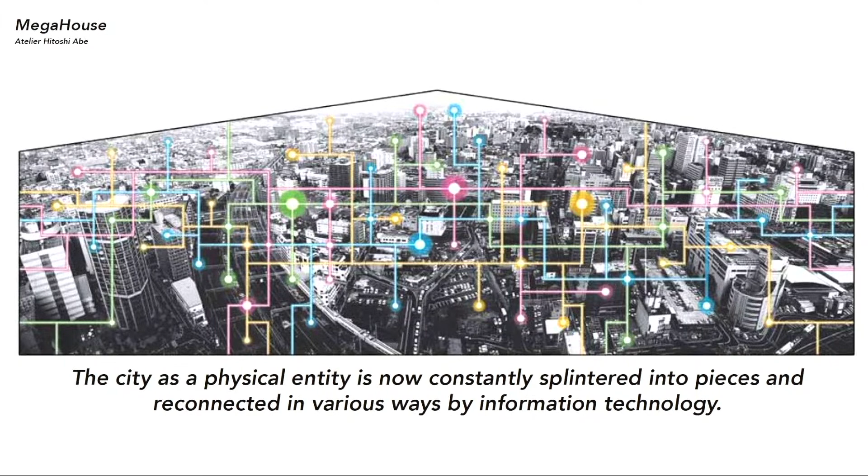Under this hypothesis, this research studio is exploring what the phenomenon of co-work living means for architecture, and how it can serve as a catalyst for a series of mutually beneficial, thoughtfully coordinated pragmatic relationships. We believe that this approach will lead us to a series of new building types, which helps us to envision the future of our living environment today.

The following key questions are asked. What is the role of architecture in contemporary collective life? How can architecture catalyze pragmatic relationships that produce value and respond to changing ideals of society? How can we critically engage the economics of architecture? How do sharing economies and changing patterns of habitation impact the way we consider space use and ownership?

What is the value of spatial proximity when decentralized communication allows work and life to happen anywhere? How can we address the fragmentation of physical spaces and the emergence of new types of communities? Being in the situation under COVID-19, this tendency will be accelerated.

The students are working in groups of 2 for initial research about various co-working living spaces in the fall. They extracted the key concept from the research and turned it into an essay in the studio publication. They continued to work as a group designing the pragmatic ecosystem throughout the winter, and then work individually for the design of the building for the final. This year, the studio is divided into 2 groups. The first group is working on a site in Nihonbashi, Tokyo, and the other is working on a site in Los Angeles.

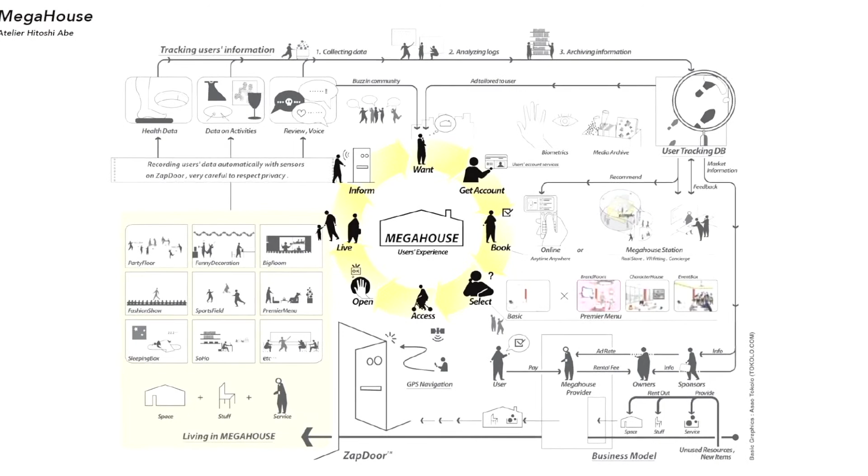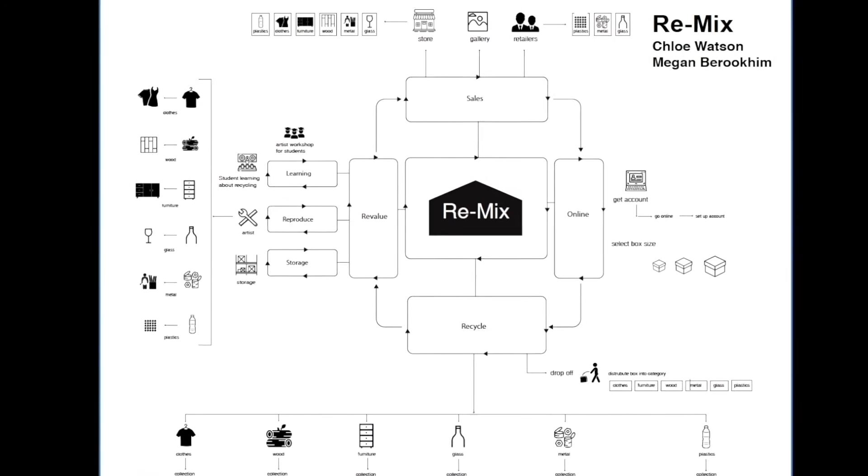A unique characteristic of MegaHouse Studio is that instead of responding to existing sets of conditions, the students are asked to come up with a design of the ecosystem, create the unique condition, and produce its own reality for their projects through an entrepreneurial approach. Students need to show how the ecosystem functions, prove its sustainability, and show how it withstands the real conditions of the world. Students do this by proposing and designing the business plan for their project. This approach might be seen as a stretch from the traditional role of architecture, but maybe there are new sets of qualities necessary for architects in an era when space is so in flux and unstable.

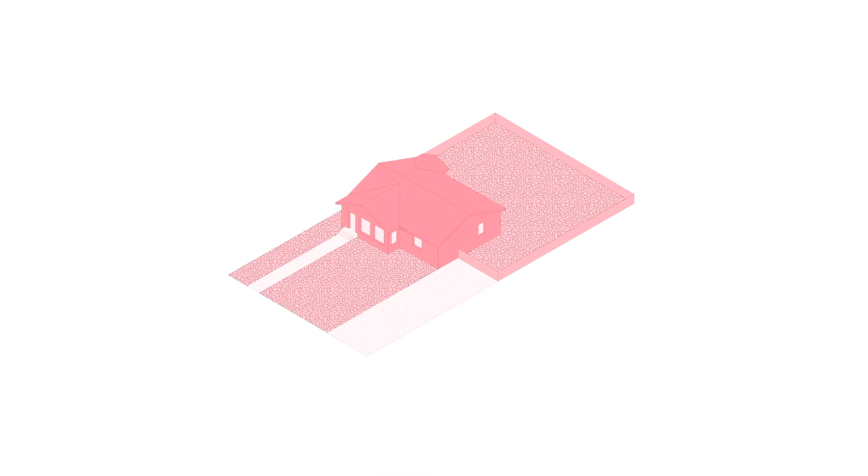Pool House, a vehicle for participatory ownership. California is in the midst of a severe housing shortage. Southern California alone has an estimated housing deficit of 800,000 units. To address this deficit, California's legislature passed State Assembly Bill 68, which allows all SFRs to add auxiliary dwelling units, known as ADUs, to the property. These units typically reside in the rear of the lot and are allowed to be as large as 1,200 square feet. With this additional new dwelling place, the backyard is transformed from private domain to semi-public shared space.

Integral to our design approach is an understanding of a typical suburban community in Los Angeles, where lots are adjacent to each other and are often separated by a fence. Eschewing the age-old adage, good fences make good neighbors, we intend to tear down barriers and create micro-communities. The configuration of these communities can take many forms, with alternative layouts producing alternative sorts of social interaction. Guiding these micro-communities is the idea of participatory ownership, wherein maintaining the semi-public shared space rests on both homeowners and tenants.

Pool House reaches out to the homeowners and offers to build them a secondary unit. Pool House puts up all the cost, handles the architecture, construction, and leasing. In return, Pool House receives a 10-year lease on the ADU, which allows it to sublet the ADU for a profit. During the 10-year lease, Pool House also makes monthly payments to homeowners for 10% of collected revenue. At the end of the 10-year lease, the homeowner keeps the secondary unit and can choose if they would like to retain Pool House as a property manager.

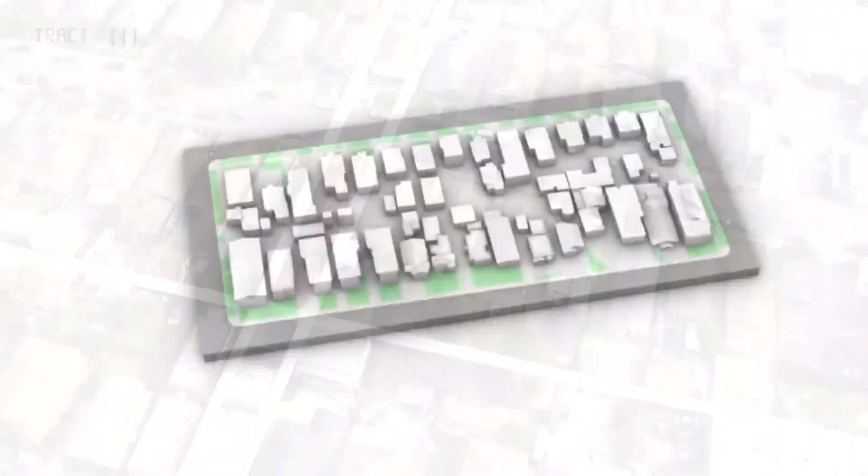Reimagining the typical Los Angeles housing block. Los Angeles, for all of its architectural variety, still retains certain uniform qualities. Notably, the city block is one such feature. In West Adams, the typical block is comprised of an array of homes that abut one another on the sides and rear of the lot, and are otherwise separated by a two-way road. Tract 1446 is one such typical block, and will serve as the basis for the forthcoming speculation and proposal.

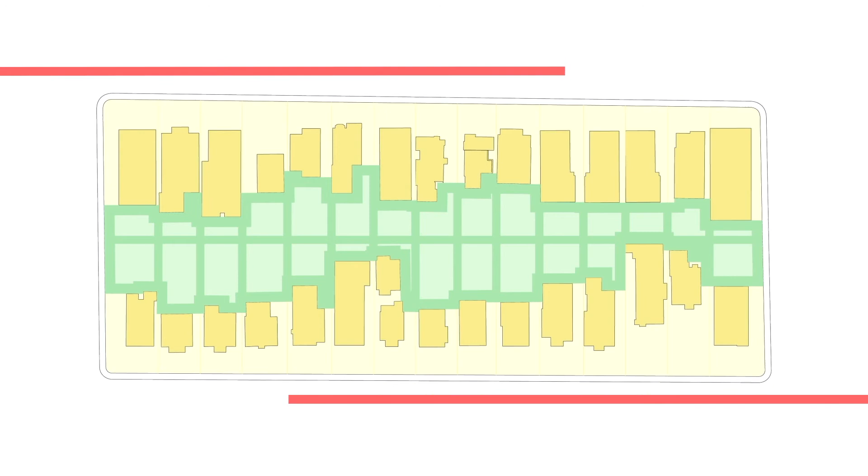By overlaying the building code distilled by Assembly Bill 68, we can begin to understand the potential for the individual lot, clusters of lots, and the block at large. We start by identifying the existing non-primary structures, which mostly comprise detached garages constructed in the 1950s. Imagining a clean slate, we apply an ADU setback analysis of 10 feet from any existing structures and 4 feet from the sides and rear of the lot, yielding a residual landmass of 27,000 square feet of developable land and an additional 29,000 square feet to be devoted to a new public thoroughfare. The result is the inversion of the typical city block, such that community life is centered along what had been the rear of the lot.

Conscious of Los Angeles' eclectic housing aesthetics, this proposal takes aim at studying and reinterpreting many of the city's iconic styles, albeit modified for affordability and rapid production. Along with 5 unique floor plans, ranging from 1-bed, 1-bath single units to 2-bed, 1-bath adjoined townhouses, this proposal also reimagines 5 specific styles: International, Craftsman, Storybook, Colonial,

and Spanish Revival. A specific element from each housing style is adapted to be generated from standard structural 1 plywood that can be rapidly produced using CNC technology. In that these elements are formed from 2-dimensional cut paths and joined by interlocking slots, the result is not a one-to-one replication of existing styles, but an approximation that signals the past while broadcasting the future, embracing a new sort of pixelated historicism.

With the statutory height limit of 16 feet for 2 or more units on a lot, our strategy deploys elevational changes as a means of providing adequate overhead space on each floor. By creating a 4-foot depression in the ground, we subvert the height limit to allow for comfortable 20-foot 2-story dwellings. Additionally, we leverage this depression in the ground as part of a larger landscape and irrigation scheme that tethers together these otherwise discrete units. The elevation change is treated as a native plant rain garden, a natural means of removing pollutants from rain runoff and providing new habitat for local flora and fauna.

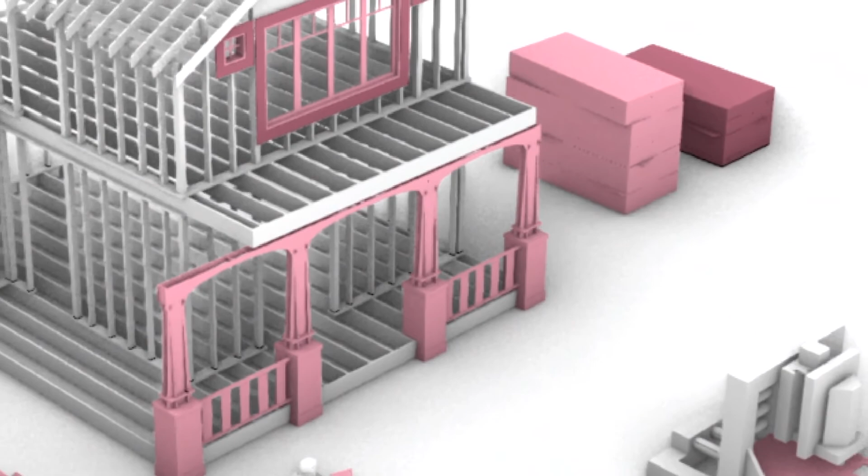The result of these actions is the production of a new community paradigm nestled within an old one. New housing stock gives way to more affordable prices. Smaller units facilitate the integration of different socioeconomic backgrounds. Rapid prototyping brings construction costs down while preserving the character of Los Angeles. A shared landscape builds community, recycles water, and offers much-needed green space. In conjunction, these speculations collide to produce a more equitable and sustainable vision of LA, achievable within every typical housing block.

Pool House, the Catalog 2020. The catalog creates a product for living. The catalog addresses the pool house block, yard, alley, house, and components. The back house aims to address an increasing idea surrounding the live-work house. The pool house catalog leverages architectural components to produce dynamic interaction between front and back houses throughout the neighborhood. Through participatory ownership, Pool House will facilitate a system of micro-landscapes to support this community of live-work housing.

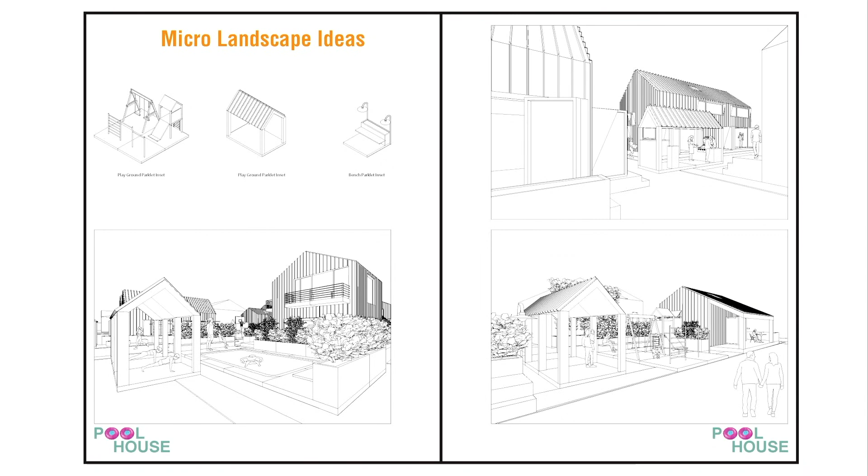The Block. Located in the southwest corner of West Adams, the block is near the Expo line. This investigation examines the city block with an alley. Pool House will start as one house and phase into a network of backyard communal spaces that superimpose a grid of houses along the alley, creating a new frontage of pedestrian movement. The project works on two scales simultaneously, a city scale and a domestic scale. The alley is activated by utilizing the 4-foot setback as parklets. Pool House sets up a network of micro-landscapes to create a harmonious relationship between neighbors.

The Pool House yard and alley break shared outdoor spaces into components. This will continue the grid into the yard, creating a system of connected back and front houses. Pool House, aiding in the transformation, will work with the city and the neighborhood to schedule times for garbage, delivery, and community events that these new civic spaces have the capacity to explore. Now that the system of micro-landscapes is structured along the alley, the new Pool House houses will be able to plug into a system within the community at large.

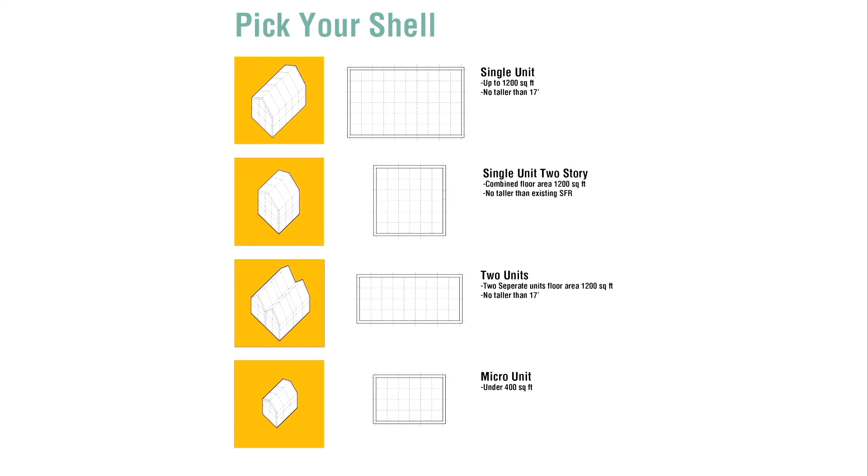The Pool House house. There are 4 housing typologies: the single unit, the single unit 2-story, the 2-unit, and the micro-unit, each with its own limitation of space, creating 4 different shells. The single-family resident owner will choose the shell they want to componentize and work with Pool House to design the house to fit within the network.

The house can be broken into 4x8 and 8x8 components, atomizing the house into interchangeable architectural elements. The components respond to the plan division, resulting in different arrangements of windows, doors, and other accessories.

As the COVID-19 pandemic has drastically altered our current living and working environments, it has also pushed us to pursue what it means to both work and live in the same space. The space of the house can be divided into the core, which includes bathroom, kitchen, laundry, and storage, and fixed living including bedrooms and private offices, and flexible living containing living room, dining, office, and work.

Within each unit, the core can shift to allow for a separation between live and work, or can be used to separate flexible and fixed living. 2-story or lofted spaces allow for the first floor to be fixed living and the second floor to be flexible living, or vice versa. Each unit is designed keeping in mind the potential of indoor-outdoor living.

The back house acts not only as a space for prospective tenants to rent, but also is flexible enough for that tenant to both live and work. Through the communal amenity yard and civic components, Pool House is creating a network within the community to help each other thrive both at home and for leisure, as well as professionally and at the office.

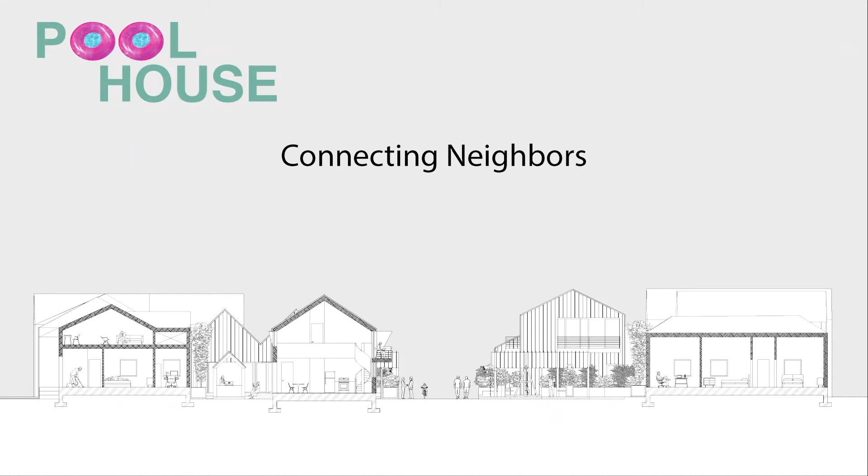Welcome to Polymix. Polymix is a philosophy that responds to the trend of buildings designed as increasingly complex polyprogrammatic containers. Polymix recognizes that by combining many programs, people, and industries, a dynamic equilibrium is produced, creating new value by increasing interaction and exchange.

We offer Polymix as a solution to Japan's challenge of the super-aging population. The strengths of the super-aging population can activate our site in Nihonbashi. We see an opportunity to mix home, work, and life science innovation to create a symbiotic super-age community. Our site is located in the heart of Tokyo, in the historic district of Nihonbashi.

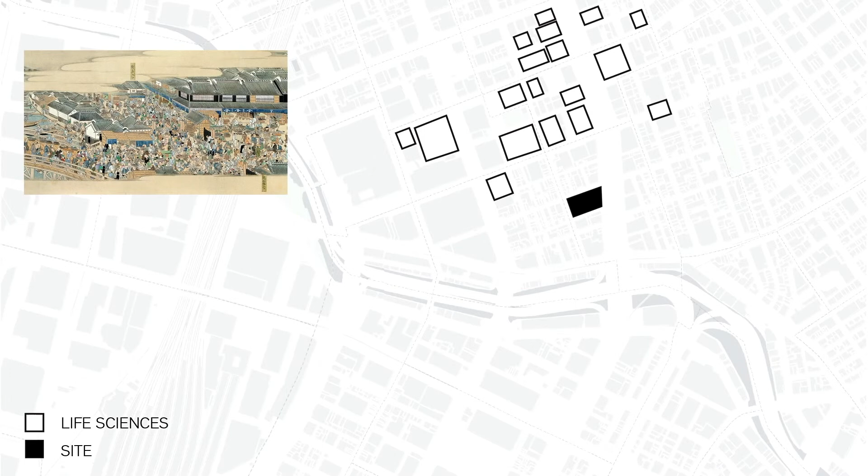Our site is located in an optimal position to bridge the life sciences to the Nihonbashi community. To the north of our site is the Life Sciences District, which includes Mitsui Fudosan's Link J facilities, which is laboratory and co-working space that supports the growth of Nihonbashi Life Sciences.

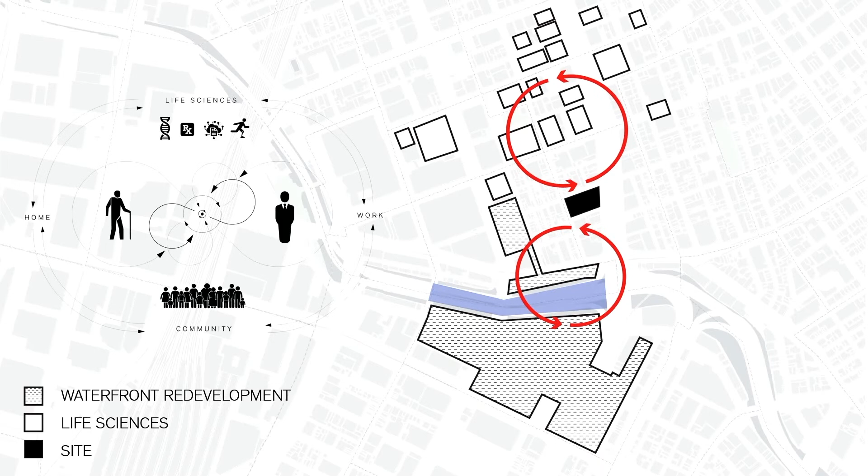To the south of our site is Mitsui Fudosan's future waterfront redevelopment project, which plans to bury the Shuto Expressway beneath the Nihonbashi River to resurrect a historic water-centric community of exchange. Additionally, an international life sciences hub is to be constructed as part of this redevelopment. Polymix draws together these powerful adjacencies into a dynamic equilibrium on site, working to pair the complex Nihonbashi ecology with the strengths of the super-aging population.

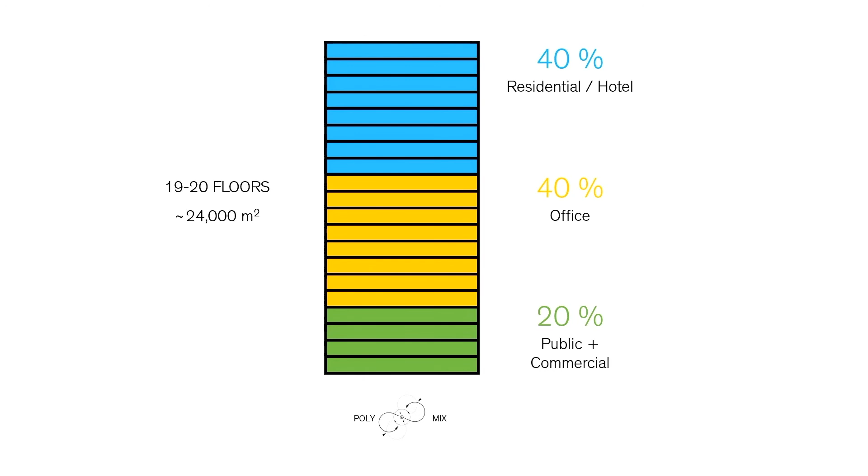Per the zoning requirements and Mitsui provided standards, a tower with 20% commercial and public space, 70% office, and 10% residential or hotel is the optimal development for our site. To fulfill the goals of Polymix, we propose an increased amount of super-age housing that works to activate the tower as a dynamic polyprogrammatic equilibrium.

To achieve this vision, the design of Polymix is driven by a polyprogrammatic ecology of social and economic exchange. What's left for Polymix is to develop the architectural typology that best supports this dynamic equilibrium of interaction and exchange. Polymix is influenced by research into many competitive cases of unique mixed-use developments. International House by 3Space is a converted government building that creates a dynamic ecosystem of tenants that support each other socially and economically through a buy-give relationship.

Polymix is set to reach beyond these unique examples of mixed-use buildings and test the limits of architecture that is designed for polyprogrammatic interaction. Nihonbashi has always served as a stage for innovation. Polymix is its next step into the future.

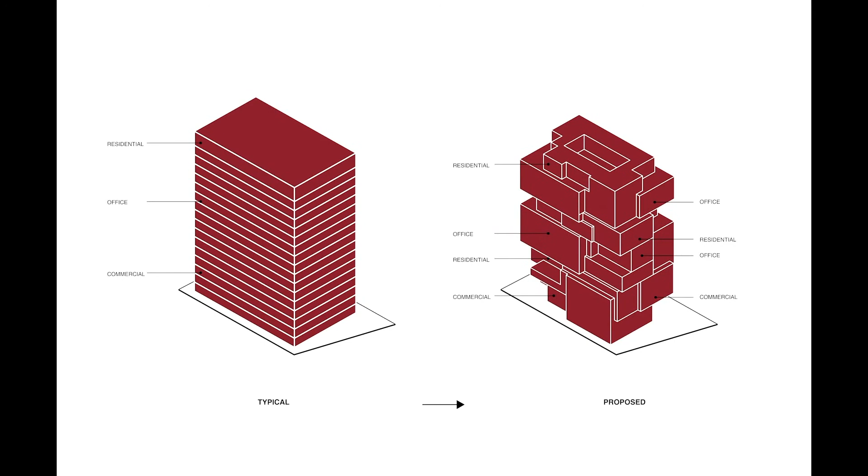Enforcing the concept of our Polymix ecology diagram, this project proposes a new building typology that challenges the typical programmatical hierarchy of the mid-rise tower. Rather than extruding another stacked high-rise tower in the Nihonbashi district of Tokyo, the project is meant to be seen and understood as an aggregation of spaces organized around the two cores of the building.

The juxtaposition of programs within the building lends itself to a new type of interactivity within a mid-rise tower. Work and home are in a constant symbiosis within the building, enhancing the quality of living of the super-age community and encouraging collaboration between residents and tenants.

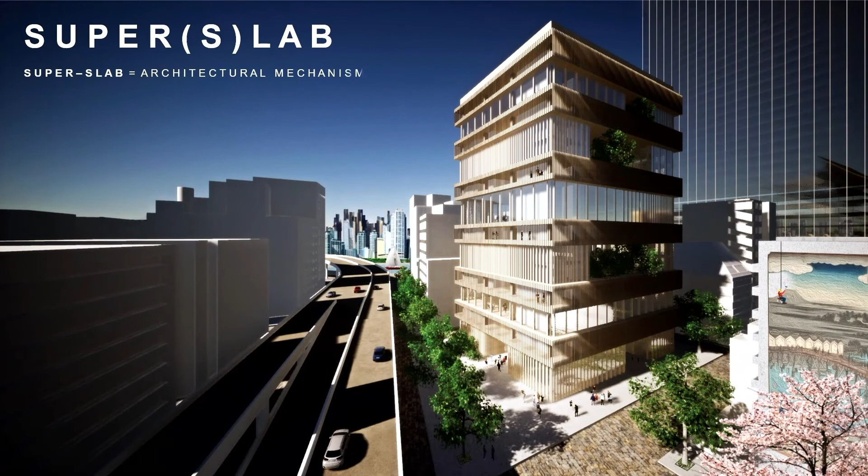Superslab, the architectural mechanism of a thickened slab functioning as super-age housing, or a think lab for the super-age lifestyle that promotes social interaction and builds new value. We begin with the typical slab construction. Notice that the interaction between floors is limited.

By enlarging the slab, inserting super-age housing into the interstitial space, and increasing the floor height to allow deeper daylighting, there emerge opportunities to carve new shared spaces into the super slab. This begins to influence the activity and behavior of the programs above and below the super slab.

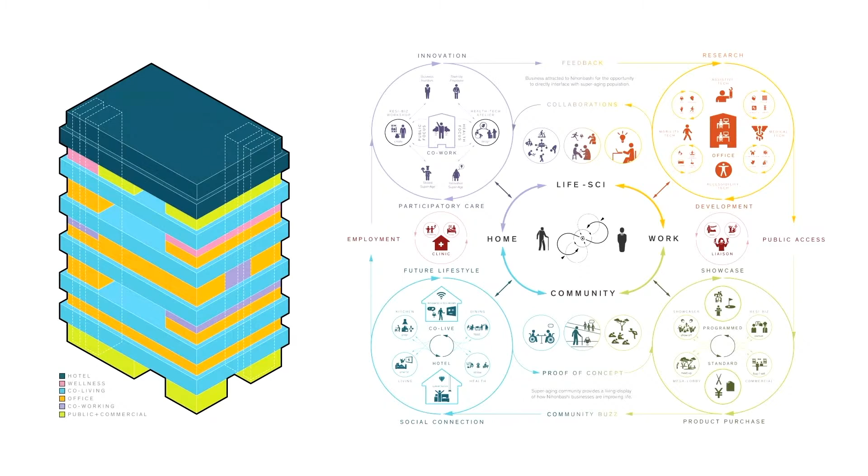Ultimately creating a unique form of mixed-use tower that capitalizes on mutual benefit. The building's massing is developed by utilizing the superslab mechanism as a bridge for the diverse relationships identified in the programmatic ecology. This creates a striated section where several residential superslabs intersect traditional mixed-use spaces.

The ground floor invites the public into the building, providing retail space that adds a warm, louvered atmosphere to Nihonbashi's streetscapes. On the third level, we encounter the first superslab sandwiched in between retail and office space. Each four-person unit is connected to semi-private perimeter circulation and also opens inward to a public interior atrium. This allows the super-age tenants to access many types of social exchange, whether it be a brief hello in the corridor or a view of the bustling activity above and below.

On the 8th level, the superslab pairs a super-age work-live space with the semi-public perimeter circulation. This promotes collaboration between tenants and businesses focused on innovation for the super-age lifestyle. In the remaining superslabs, the semi-private perimeter thickens to provide public courtyards for businesses or hotel amenities to share. These spaces provide unique sky courtyards that promote interaction and provide a pleasant environment for the users and tenants of the building.

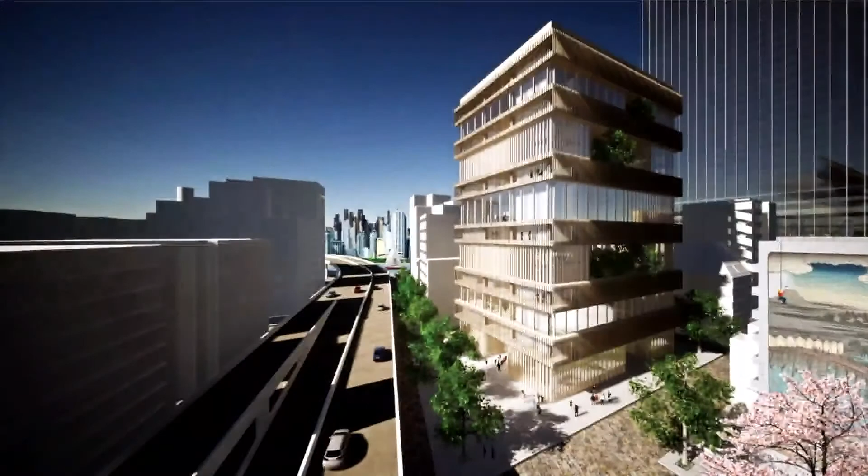Superslab is a unique opportunity to provide a new lifestyle for the super-aging population, one that decreases social isolation, builds a new value for the super-agers, and provides a landmark building for Nihonbashi's redevelopment.

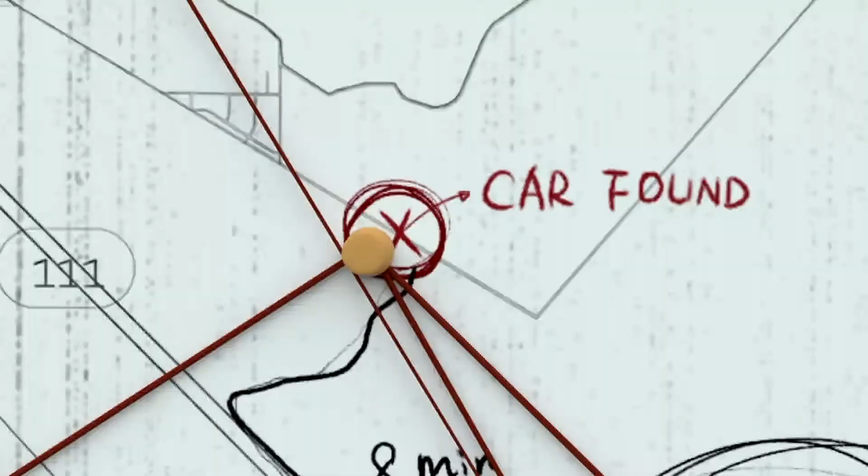Incognito is a film that uses a criminal investigation as a medium to explore how different types of memories are interconnected or pitted against each other. The case we follow is examined by a human detective in collaboration with an AI analyst. In our real world, the increasing abilities of AI systems and documentation technologies allow for 2.5 quintillion bytes of data to be generated daily, even at obscure locations.

As humans, we tend to gravitate towards stories as opposed to cold facts, which often lead to tensions when these forms of evidence contradict one another. When looking at one event, the number of narratives that record it is dependent on the different memories associated with it. Whether they are sworn testimonies, online data, or algorithmic classifiers, we start to notice the contradictions among those, and we begin to wonder, which one is more trustworthy? How does bias affect us?

When we look at objects isolated from context, like an evidence board, to construct a narrative, we interpolate. We use story and invention to connect the dots. And these narratives are constantly infiltrated with our biases and interpretations. Incognito challenges the idea of objective or infallible memories and suggests that memory is not a remembering of the past. It is a creative act that weaves together an experience and an environment with its associated senses and emotions.

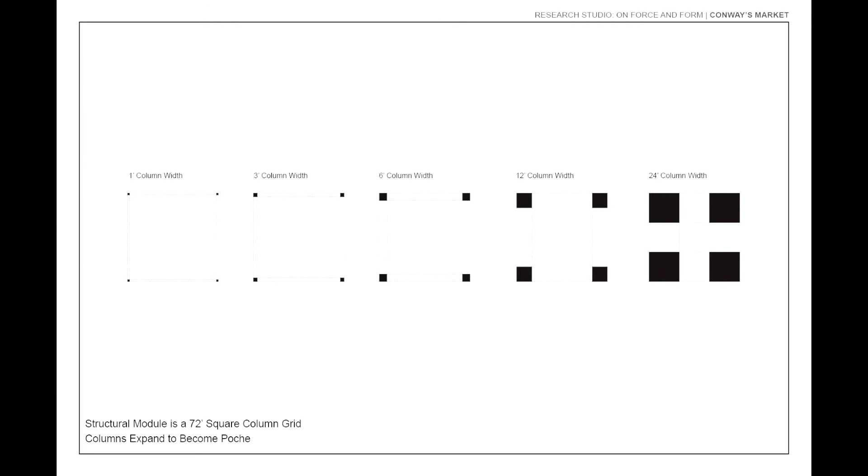There are a total of 5 structural modules, with poche columns ranging in size from 1 foot square to 24 foot square, allowing for a range of functions from those that are purely structural to forming occupiable spaces of varying scales. As the modules aggregate to create the field of the market hall, adjacent columns combine to create entirely new figures. The original column module dissolves, and new complex clusters are formed.

My proposal for a market in Hollywood demonstrates that poche does not need to maintain Kahn's strict binary and can instead form a bistable relationship. It uses the shape of the poche and its containment of the program to organize interactions. At times, the poche object can act as a corner and defer to the market space, or the poche object can become the focus. Unlike Kahn, the space is not always the figure.

The roof of the market utilizes the same 72-foot column spacing. The roof planes are lifted above the poche column figures, supported by thinner columns to add lightness to the structure, similar to Kahn's Trenton Bathhouse. There are 2 roof modules based on permutations of a butterfly roof. Aggregating these modules allows light to permeate into the space from one direction, producing dual lighting effects and porosities.

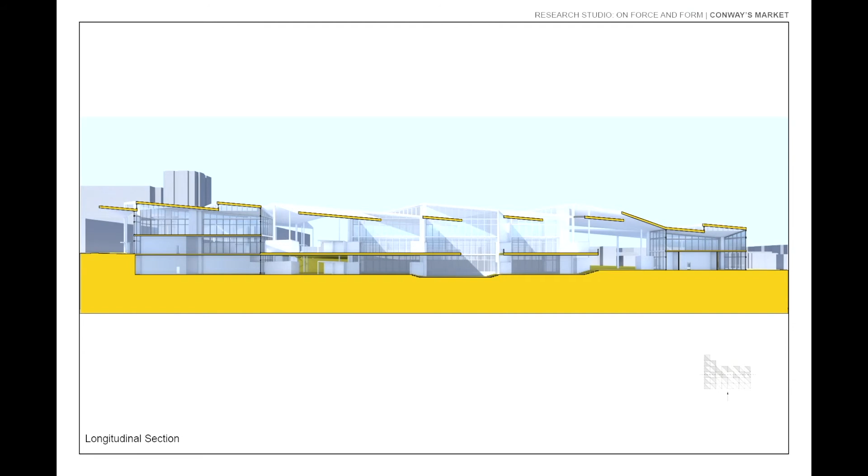The proposed market occupies a large site, with commercial zoning to the north and east, and single-family zoning to the south and west. The program combines elements of an open-air market, as well as a town hall. The site elevation shifts by 1 level, with the north being 15 feet higher than the south. Consequently, visitors enter the site on the first floor on the south, and on the second level from the north. The plans are organized with the town hall primarily placed along the north and east commercial-facing edges of the site.

In plan, the column aggregations create dynamic bistability with the spaces they define. Bistability occurs when a system has multiple stable states or perceptions. Here, the column aggregations sometimes become objects with the surrounding space acting as the field, while at other times the space becomes figural and the aggregations are the background.

In contrast to the orthogonal column grid, the butterfly roof is organized along a diagonal grain. This reinforces the reading of the columns as independent figures within a field, rather than dropping into the background as an abstract series. The grain of the roof encourages non-orthogonal movement through the market, which is further encouraged by strategic placement of column modules in program.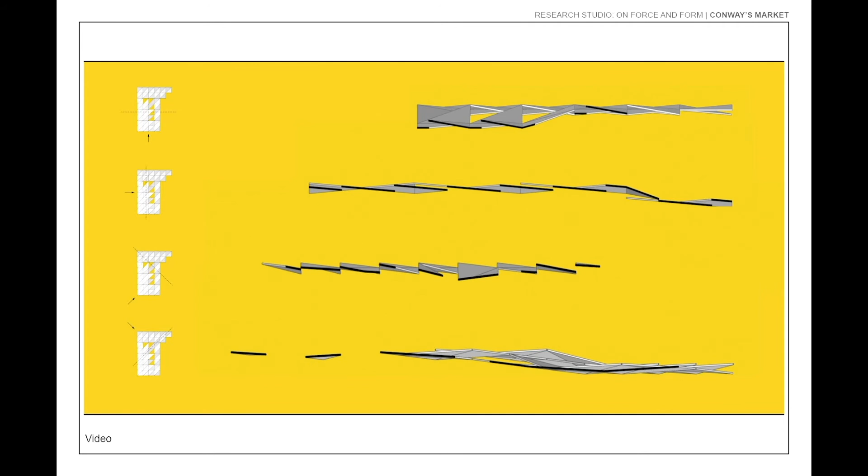Moving sectionally, the roof can be read as a series of small discontinuous panels or as long continuous planes. From the southwest, the roof appears continuous. From the northeast, the discontinuities are revealed. These dual readings create different effects within the market.

The discontinuities help with daylighting and climate control. The north-facing openings allow sunlight into the space, while shading visitors from harsh light and heat. The roof also helps orient visitors by providing different experiences depending on orientation.

Through the layering of multiple hierarchies, the market produces non-hierarchy. The visitor does not defer to a single imposed order. Through bistability and duality, many forms of occupation unfold.

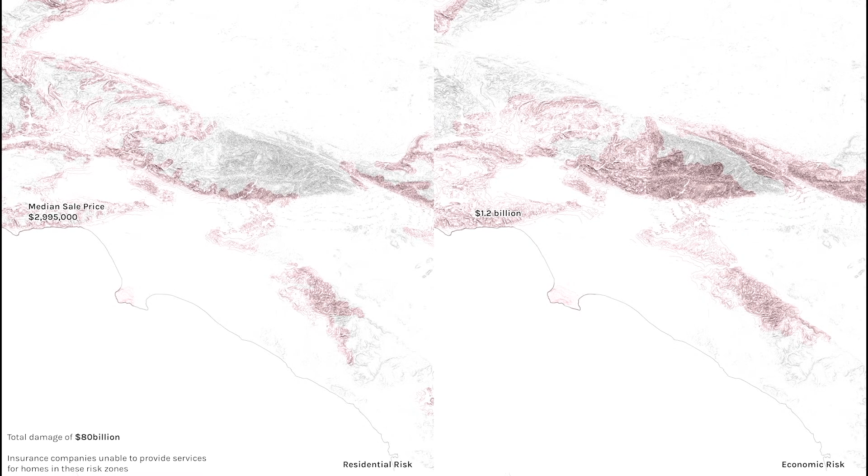Research shows that the spread of these wildfires is also linked to topography. Hillside slopes are directly proportional to the intensity of the spread of the fire. Of these hills, canyons and valleys are the most dangerous. Single-axis roads with no escape routes and steep slopes caused by construction put these residents at the greatest risk.

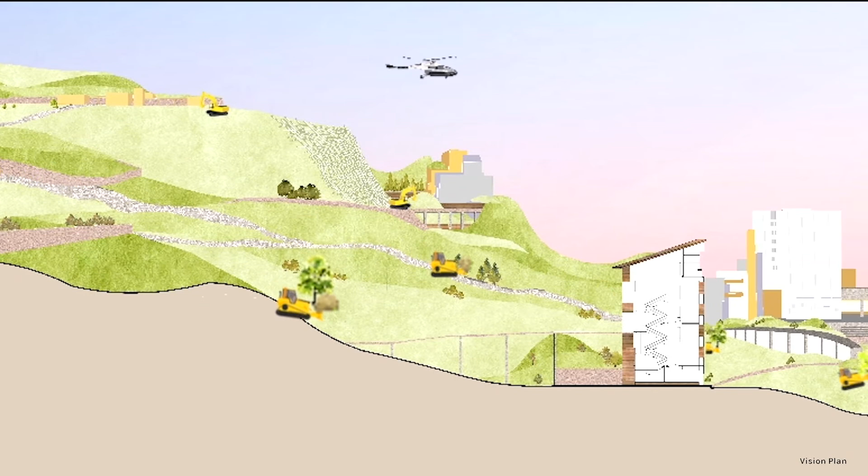The third mountain alters the slope of hillsides to stem the spread of fire. The third mountain is created by cut and fill, taking land from these mountains in order to reduce the slope and extending the excavated earth as fingers into urban areas. Bulldozers are used to carry soil, trees, and other landscape elements from the original mountain down to the flatlands to be used as new building and landscape material. It's as if the first mountains are finding a new way of expression through the third mountain.

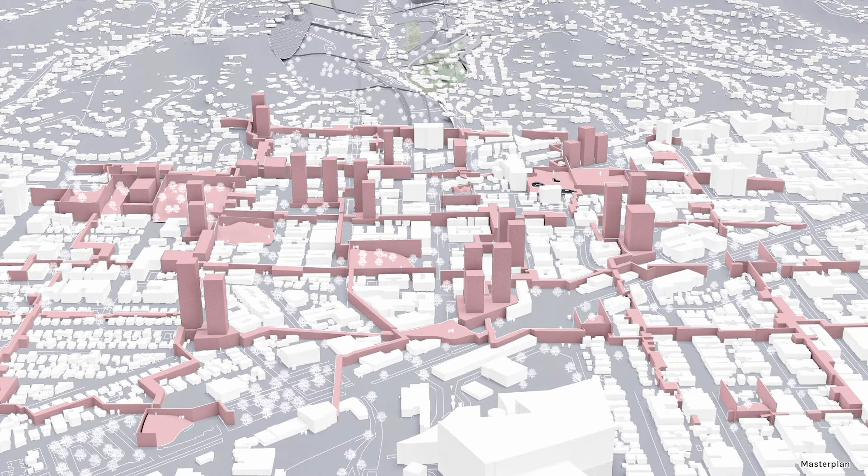The earth that is brought down is used to create a new master plan. It takes the form of rammed earth architecture, a sustainable building material, strategically inserted in the existing urban fabric. This process ensures that building material need not be transported from far-off places.

Mountain soil from the valleys is regraded and collected. It is then distributed as a new grade that is overlaid over the street. This grade is then distorted and modulated to respect existing landmarks. In this side of West Hollywood, the grid conforms around historical landmarks like Sunset Strip, preservation landmarks, and roads with high traffic.

In 2050, the air quality is much worse, and the outdoors aren't the ideal place to enjoy the city. The city has transformed. Life in 2050 is all about learning to live alongside wildfires and their consequences. The third mountain manifests itself in earth as a new materiality, as a construction material and landscape element.

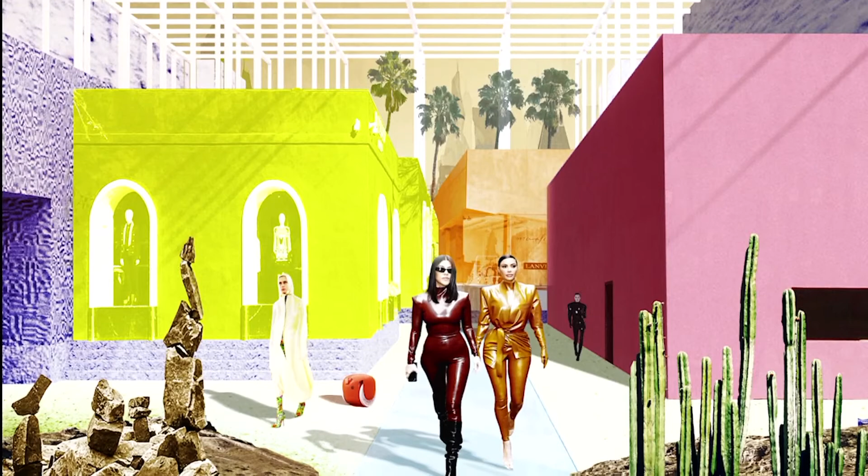We leave the old days glamour in the mountains behind and create new Los Angeles glamour down in the flatlands, where we are required to spend more time in controlled and covered environments. A new story of living indoors in artificial nature begins here.

Our proposal includes two scales of architecture, a radical landscape and housing community created having largely interior-based spaces. The houses in the settlement follow the same zoning of single-family houses that is characteristic of Los Angeles, while the radical landscape creates larger spaces within that can be used for a range of activities.

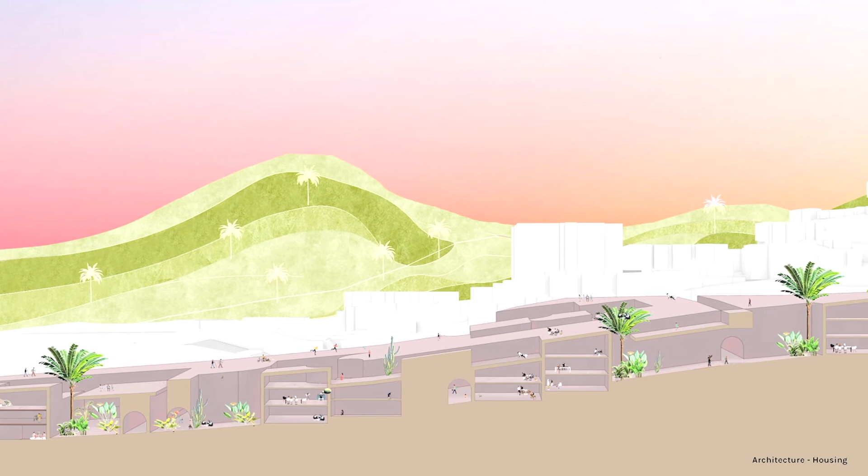Circulation begins with the main pedestrian path from the master plan and then branches out into private roads for the houses, creating house blocks. The courtyards are designed to provide privacy while maintaining visual communication. The rammed earth architecture follows the general slope of the land. Covered and semi-covered walking paths, through landscape views, and small social spaces are unique characteristics of the complex. They are the result of the Third Mountain's architectural method and material.

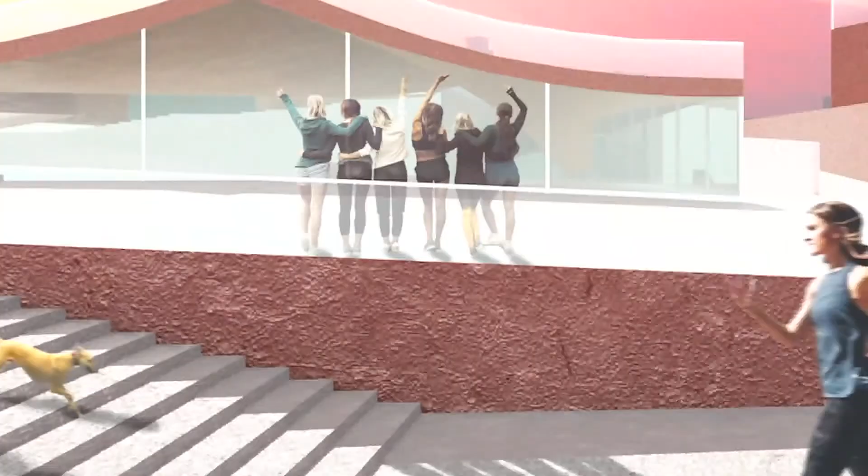The radical landscape comprises public buildings that can be used for various purposes. It is stepped from Sunset Avenue to Hollywood Drive with rammed earth retaining walls. A combination of this landform itself and deliberately created artificial nature is the new aesthetics that we envision. Along the side, the architecture is embedded into the scalloped earth form. A combination of underground and open-to-sky areas creates a new experience for interacting with nature in 2050.

If the first mountains of Los Angeles were formed naturally, and the second by post-war clearance and demolition of mountaintops, then the third mountain synthesizes nature and artifice into an architecture made up entirely of the materiality of land. It embraces its artificiality in the urbanscapes. The first mountain has found itself transported and transformed for an indoor life in 2050 LA, rising to the challenge of new age climate threats.

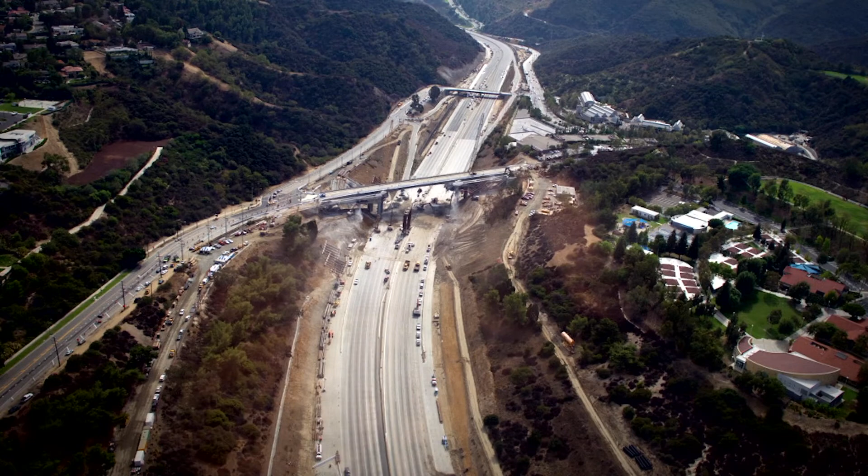As current society is facing problems such as increasing land value and scarcity, the freeway makes a new possibility where it can be utilized not only for transportation, but in multiple ways to solve these dilemmas. The reliability of the freeway system for transportation will decrease, as we've seen on occasions like Carmageddon, where the 405 has been shut down and given Angelenos a break from continuous driving.

By understanding the freeway as given land, this new prototype for development recommends modifying the single-use transportation system into multi-use infrastructure with permanent and temporary mobile architecture spread across the freeway system intersections, simultaneously responding to land scarcity and providing new ground for LA 2050.

This project interprets the freeway as developable land, and envisioning 2050 LA, this found land is utilized as a node for urban development. As one of Reyner Banham's four ecologies of LA, the Los Angeles freeway system is notable for being the primary infrastructure for public life in the city. This new prototype for development creates nodes of architecture spread across the freeway system's intersections as a response to land scarcity and a vision plan for urban life in LA 2050.

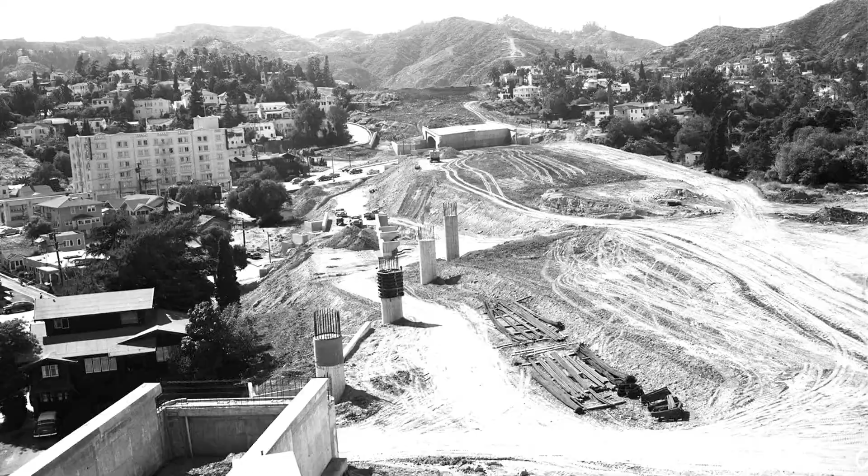The current freeway system going through LA County is taking up an area equal to 3 times the area of downtown Los Angeles. The freeway went through massive land transformation in the process of construction. With the scale of the past construction of the freeway in mind, there is an opportunity in the freeway's embodied energy as given land for future urban development. As the firm concrete structure resembles the modern-day construction system in America, we decided to use the freeway structure as a base for new urban development in 2050, which is also an economical choice.

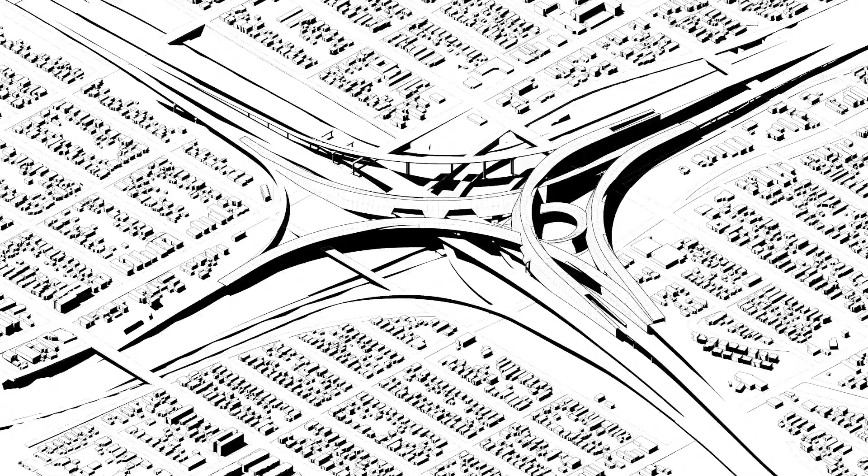We chose the Harbor intersection as our site since it is one of the most interesting and complex intersections in Los Angeles. We started with analyzing the existing structure and found that, apart from the embodied energy, the beauty of the freeway curves is also something that we should preserve. So we used the twisting geometry to show the rhythm of the freeway. And this is a part we zoomed into at architectural scale because this part is complex enough to cover most situations. Since we assume the freeway as a line, the way we transform the line is to hang an artificial line under the existing structure.

From bottom to top, the artificial line including the artificial landscape, freeway surface, and the landscape on the rooftop. Each layer is connected by the ramps between them. Since we add new burden on the old structure, to make the new structure light and economical, the overall structural strategy we use is suspension.

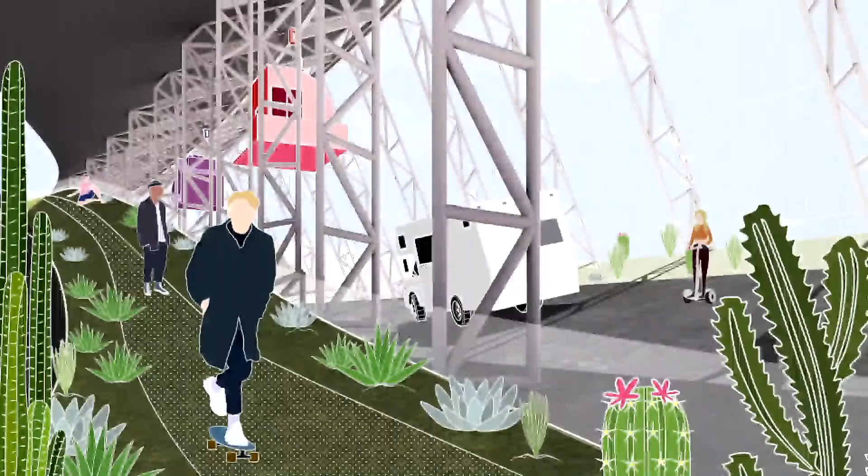In this system, there is a hierarchy of temporality and stability. The most prominent part is the original freeway structure, which supports the whole new structure. The semi-permanent part is the new truss and artificial lines suspended under the freeway, and the most mobile and temporary part is the rail system and mobile units hanging under the truss and the slabs.

We have reached an area where the car, the pedestrian, and architecture can work together to transform what was once a single-use infrastructure to a multifaceted system. Both fixed and temporary units glide across the rail system to transport programs to different areas of the freeway urbanism. Outdoor dining, outdoor gyms, and small commercial shops all activate the space to provide all the amenities any typical resident will need. Ramps provide access to the landscape below the freeway as well as to roof gardens, while autonomous cars navigate their way seamlessly through the linear structure, providing continuous transportation without interruption.

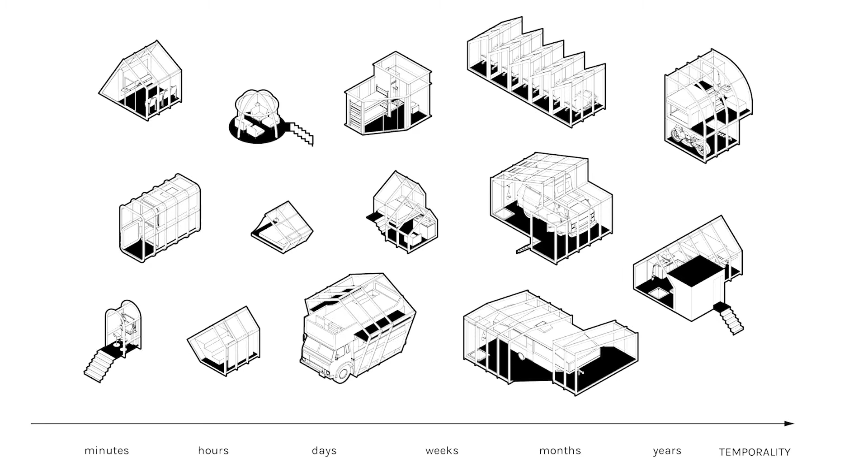The mobile units are designed by the concept of customized personal space. The components of units are prefabricated and delivered to the assembly platform inside the building. After assembly, the units will be transported by an automatic rail system. The unit types can be categorized according to programs and temporality. We developed living units for long-term stay as a complete apartment, shorter-term stay as RV carports, or even shorter-term stay like sleeping capsules, and units for other purposes like gaming space and meeting rooms.

The programs inside the linear mass are organized by a hierarchy of public and private, with public programs in the middle and residential area at the end. The intersection area has the most public programs. The intersection areas create volume appropriate for different architecture programs, such as manufacturing areas for unit assembly, compact parking, commercial programs, and public space.

The studio between architecture takes as its main concern the capacity of the section to move beyond the serial stack and instead to develop complex spatial propositions for nesting together a parking garage and a gym. In his article, Successive Architecture, Preston Scott Cohen writes, "Gridiron urbanization led to what is still to this day the most pervasive governing spatial principle of architecture, vertical succession, the unartistically considered non-hierarchical piling of discrete horizontal slabs of space, one atop the other. Vertical succession relegates the architect's role to designing facades and interior surfaces."

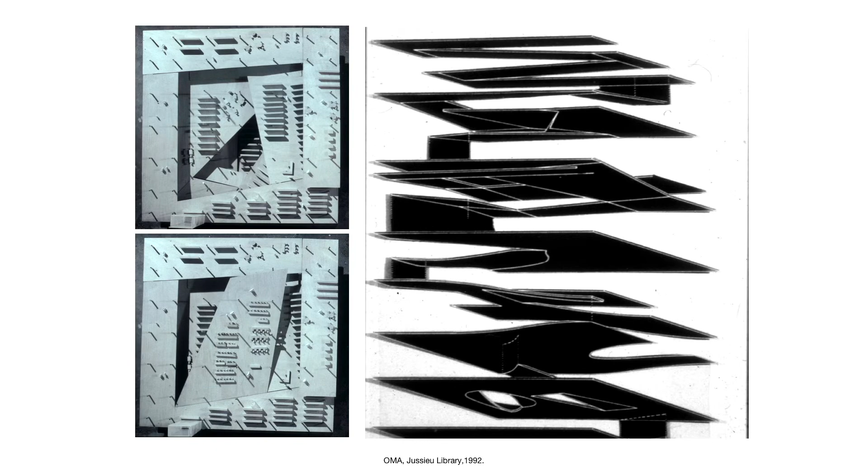This dissolution of sectional hierarchy and the subsequent relegation of architecture to a tinkering at the edges points to a series of problems that are at the heart of this first-year core studio. Namely, what can a section do, and what, if any, is its relationship to the elevation? In this studio, we look to the section as a place of great intensity that could dislodge expected relations between parts, as well as expose and choreograph alternative sequences and organizations of view and action. With this in mind, we focused on the section's generative orientation in architecture, rather than strictly seeing it as a post facto analytical instrument.

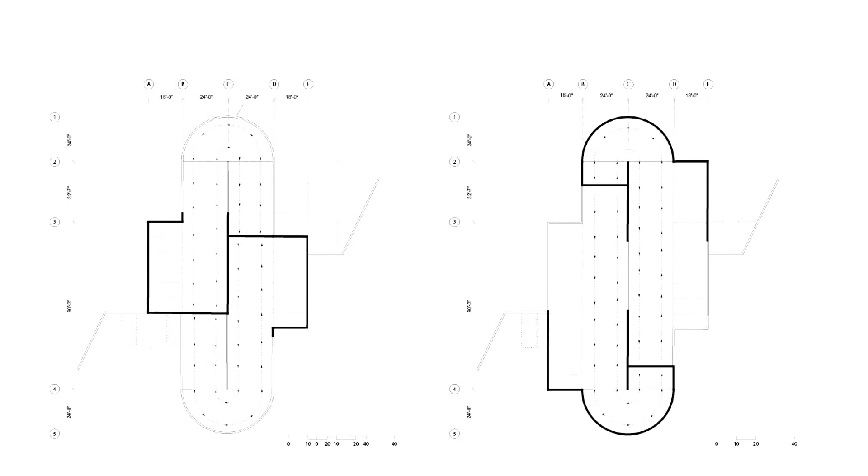In an effort to immediately challenge and interrogate the limitations of the stack, we began the studio by engaging a parking garage as an incitement for the development of a sectionally charged proposal, paying particular attention to 4 parking types: straight ramps, ramp floors, split level, and helical ramps. While at first glance the organization and circulation of cars in a parking garage may seem a banal and burdensome coordination of metrics, turning radii, numerical capacity, structural spacing, the arrangement of cars offers an immediate engagement with sectional motivations. In this sense, the parking garage is understood as a kind of sectional ready-made, preloaded with stubborn logics and formal resistance, against which an architectural proposition could be forwarded.

In lieu of a precedent, we endeavored to understand and tame the highly specialized workings of parking garage structures and their discrete typologies, finding that once the basic parameters of parking were understood, a great range of possibilities became apparent in the choreography of ramps, slabs, stacks, splits, and spirals. At a large scale, parking provides a coarse sectional strategy that dislodges the serial flat plane as a given datum of a building while remaining adherent to the necessities of movement and use.

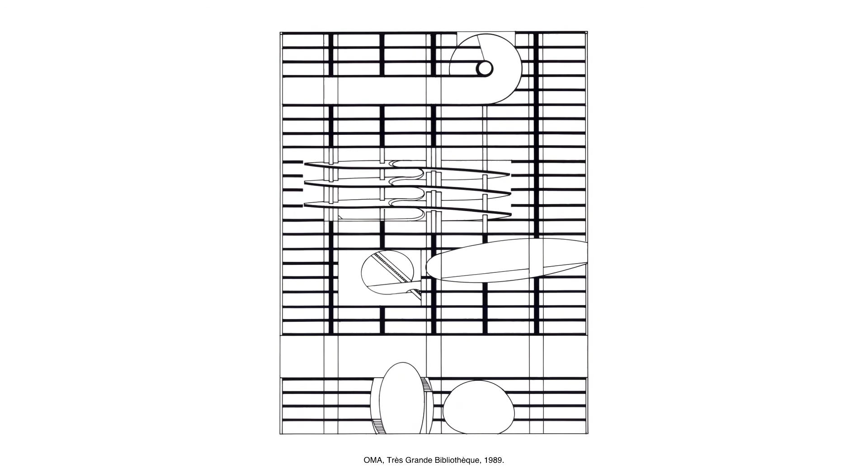It is these qualities of the parking garage, its prescriptive limitations as well as its potential exuberances, that we imagined as the fraught datum against which a second set of concerns might take root. As architecture is rarely allegiant to a single set of concerns, the forces that motivate the arrangement of spaces are always multiple and rarely straightforwardly resolvable.

In part 2 of the studio, we introduced a secondary set of programs, which operate at a different sectional measure, that of the recreational gym, with its specifications for wet and dry zones, small and large activities, as well as its rituals of use. Rather than consider these two programs as merely coexisting side by side or above and below, we imagined an opportunistic intermingling of the two.

This expanded set of considerations of scale, volume, organization, and movement was interpreted in each proposal as complementary, oppositional, or otherwise with the initial parking structure, and necessitated an architectural proposal that could manage both propinquity and juxtaposition. As the demands of the brief required an extended distribution of parking and gym in section, so too does each proposal require an approach to continuities and discontinuities in sequence and movement.

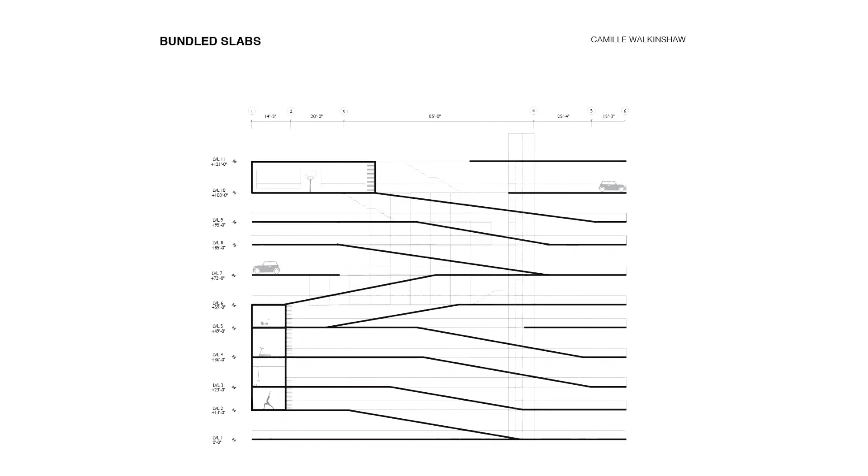That is to say, a considerable amount of pressure was placed on developing a strategy of organization, and then to develop a strategy of circulation that could advance the spatial ambitions of each project while establishing coherence and legibility for use. Finally, in part 3, the internal struggle of the constituent parts within came to bear on the elevation.

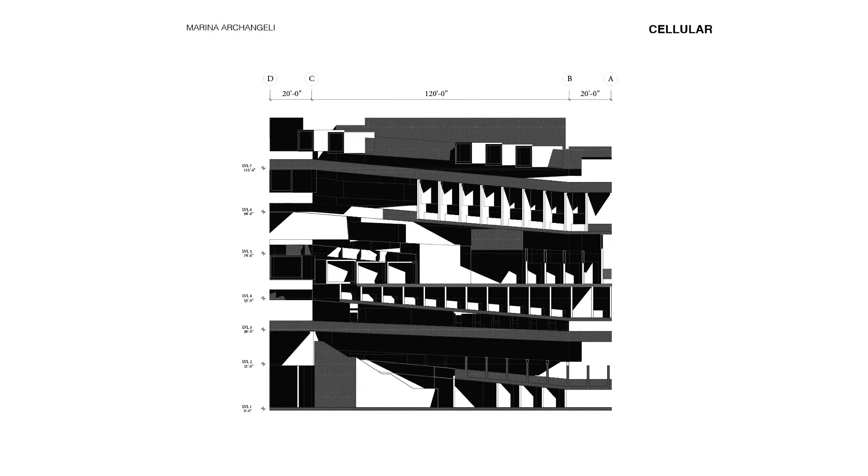Here the section's hidden nature, its knowability revealed only through the projection of an abstract cut, helped us position the range of operations afforded by the outward-facing and immediately available elevation. That is, just as the section cut reveals, the elevation conceals. In the end, the elevation is what we see, the outermost surface of an enclosure, whether inside or out, its insistent visibility masking whatever ingenuity the section might have lying within.

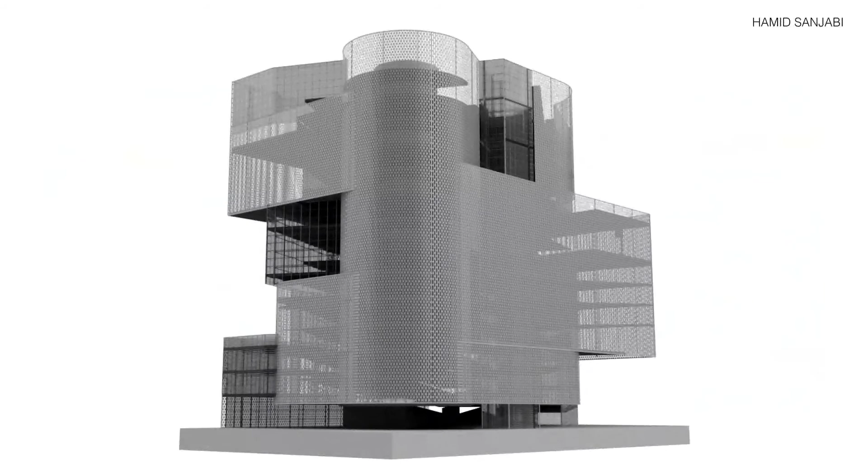Working on a tight infill lot in downtown LA, the proposals finally confront the regulating lines of the city, setting the internal workings of the building into tension with the exterior and provoking a discussion on insides and outsides, their modes of production and reception, as well as their respective allegiances. Between what is revealed and concealed, what is read and what is experienced, this studio asks how working in section differs from other ways of seeing architecture, what it makes available and by what means, and how we might consider the section's connection to what is finally revealed at the elevation.

This project considers the parking garage to be one thing, continuous, repetitive circulation, and the gym to be many things, a collection of independent, programmatic fragments. By breaking both garage and gym into fragments that are folded into continuous circulation, this project seeks to produce an experience of continuity within an image of discontinuity. The garage is organized as a split-level system which is broken into irregular, misaligned fragments in order to create space for the nesting of multiple gyms.

These gyms are organized as independent entities and are subdivided further according to the programmatic specificities of each. The resultant collection of garage and gym fragments are intermixed to make ambiguous the differences between the two, producing 3 coarse, autonomous building fragments stitched together by a continuous exteriorized circulation that navigates the fissure between them while indexing the continuity of the garage. In section, a different type of continuity is implied as an internal staple stair connects a program within each gym. In elevation, the reading is different, as the garage acts as the stitch that stabilizes and binds 3 gyms together.

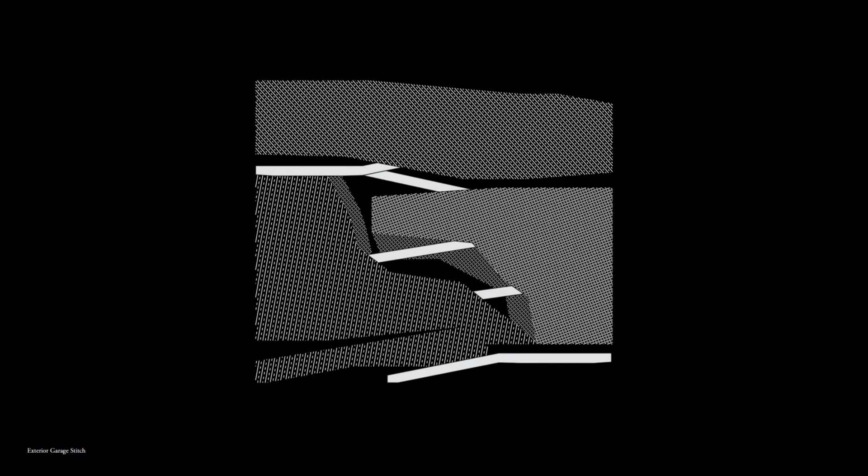The layering of circulation systems brings forth a continuity that can be read in the film frames of plan. Pedestrian and vehicle both enter from the west and circulate along the southern edge, wrapping inward and back outward to connect the separate entries of the 3 autonomous buildings, each of which is stapled internally with its own independent stair. And while these layers of continuity are visible in plan, they are less legible in section, which is agitated, expressive, and finely fragmented to address the multivalent requirements of a dynamic and heterogeneous gym.

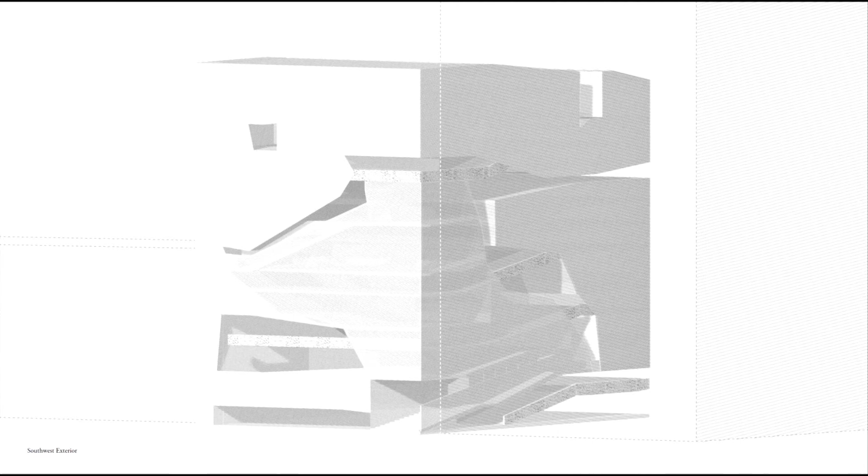Elevation, conversely, is understated, suppressive, and coarse, operating as an organizational device for producing coherence, clarity, and continuity between gym and garage. This binary is undone, however, as section appears in elevation, superimposing light, shadow, and fissure to animate an otherwise blank veil. Likewise, elevation wraps inward to manifest in section as multiple layers of enclosure, selectively masking, blinding, and ordering the disorder.

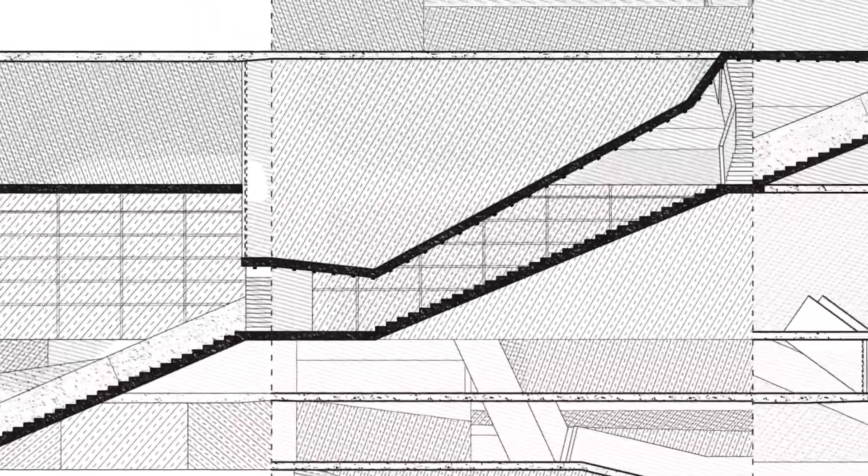This layering of light, shadow, enclosure, and circulation produces a reciprocity between section and elevation, whereby their literal descriptions collapse into a hybrid construct that allows one to occupy elevation and experience its continuity inside of a discontinuous section. In this reciprocity exists a codependence of garage and gym, of elevation and section, of one and many, in which each amplifies and undoes the other to reconsider the binary that the project sets up. In doing so, this project challenges the approach that positions the one against the other and instead argues for the productive potential that exists in the superimposition of the layers between.

This project is interested in blurring the reading between gym and parking by using the parking unit as an organizational module to the gym for the building as a whole. As program is packed, stacked, and articulated, so too the distinction between section and elevation is blurred.

This project takes a ramped floor parking garage and explores how the floor plates can be expanded and contracted due to the rotation of parking stalls. It understands the parking stall as an elastic unit that through its orientation can expand and contract the overall structure and organization of the garage and gym.

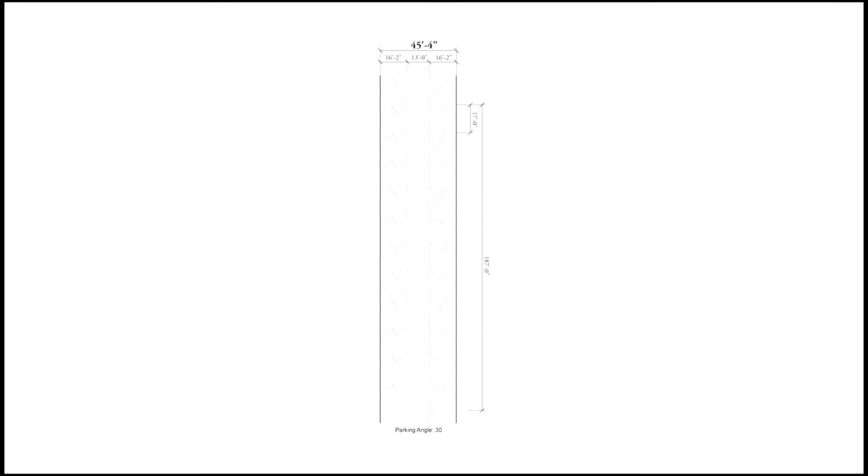As the angle of rotation of a parking stall decreases, the overall width does as well, creating space for alternate program. It is into these spaces and the spaces of the parking stall the gym program can be inserted. Gym program takes the parking stall as an organizational module and through tight scalar packing creates new forms and organization.

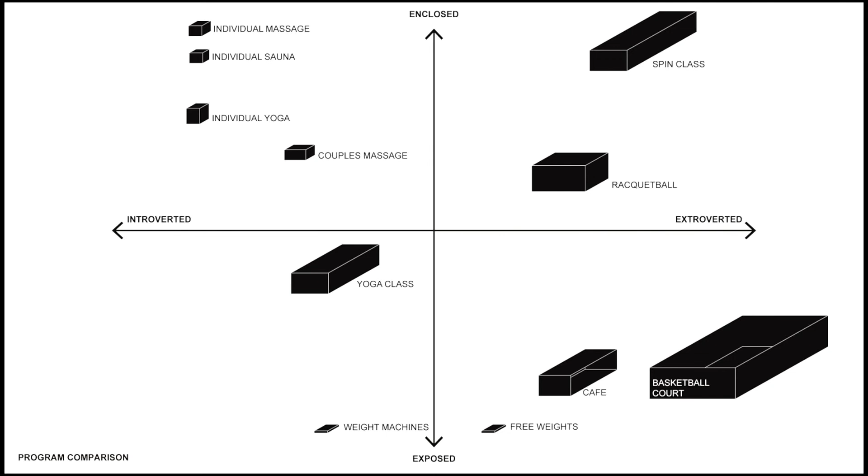The stitching together of rotated parking stalls creates openings in plan that become fissures in section. Once gym program is introduced into plan, the fissures multiply and offer moments at which the section can be experienced. This project looks at how program operates on a spectrum of introverted versus extroverted activities and compares how that affects whether a space is enclosed or exposed.

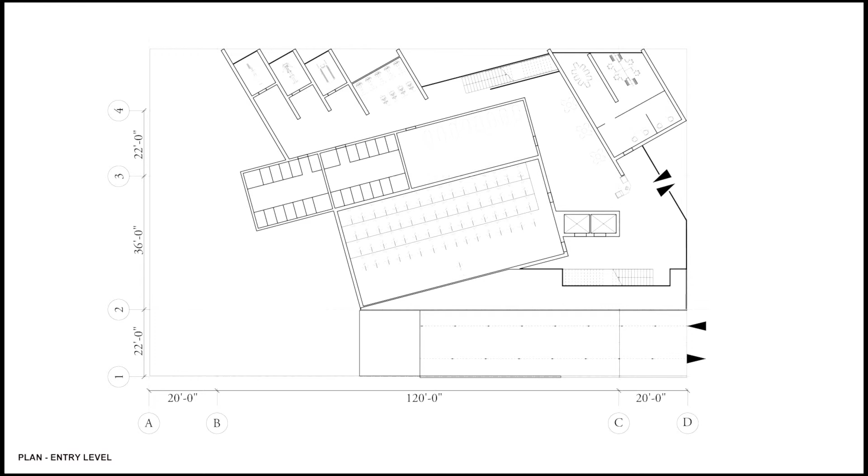As one enters the garage, they are immediately confronted with how parking stalls are pushed out of the way by large programmatic pieces. On some levels, the gym is subsumed inward so that program is held within garage circulation and situated within the grid of parking stalls. Other levels are devoted solely to parking, with gym program placed above and below. As large extroverted program is inserted into the garage, car circulation is forced to bend around the program, placing program at a higher level of importance than the car.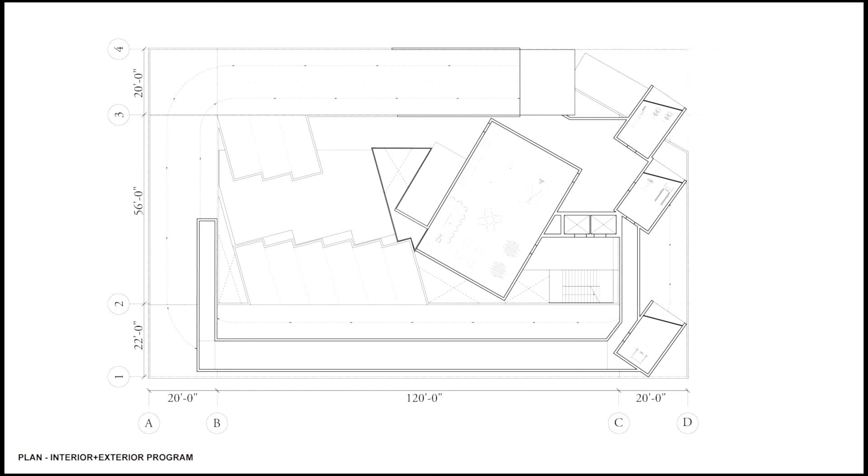Pedestrian circulation is treated in the same manner as it bends around program pieces and becomes the connective tissue between different activities. Fissures are slotted between program and parking and create a visual connection between different levels. It is at these moments that it is possible to experience and internalize the collision of the program and impact of the planimetric cinching. As fissures span from level to level, a visual connection is created while limiting the understanding of section by other senses. The fissures create moments of peace within the gym, while at other times become filled with the cacophony typical of a traditional gym floor.

Section reveals the tight stacking of plans and program, and collision of tightly packed modules is visible through the fissures between levels. The garage circulation shifts in plan to accommodate gym program, and the hierarchical relationship between program and circulation is emphasized. The distinction between parking and program module begins to disappear, and the separation between gym and garage becomes blurred. Through the cellular organization, the language of section is brought to the elevation, and section creates elevation, rendering the difference between the two obsolete.

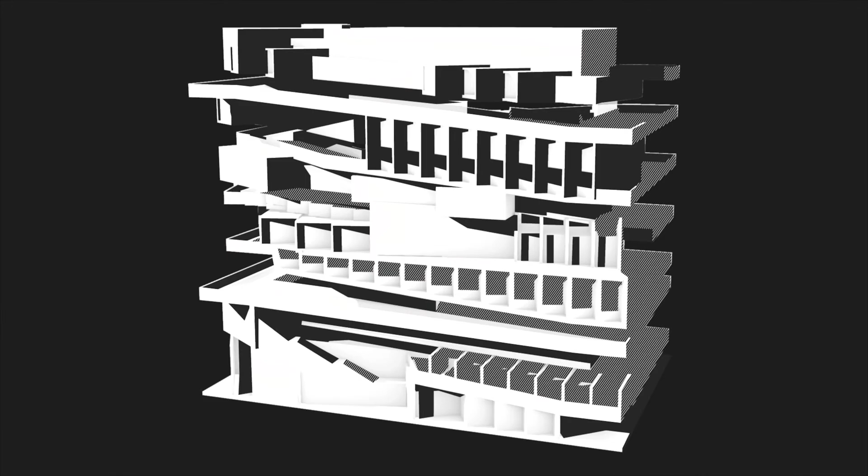As program wraps garage, the garage circulation remains obvious, while the parking stalls are subsumed by the gym, blurring the boundary between two previously distinct elements of the building. The experience on the exterior is analogous to that on the interior, with the visitor constantly confronted by the scalar packing and stacking of parking and program modules. In this project, the elevation subverts the traditional inward-facing nature of the ramp plan, such that the interior and exterior elevations read as having equal importance and form, and the section and elevation become the same.

My name is Emily Sherman, and my project is about the flicker effect. The flicker effect of the single image reveals the accumulation of frames. This quote is taken from Scott Cohen's article, Successive Architecture, where he compares the method of architectural extrusion to Andy Warhol's 1963 film, Sleep. Cohen argues that extruded form creates a similar flicker effect to that of the film.

However, I would argue that to achieve Warhol's flicker, a more nuanced method is necessary. In my project, as we move from elevation or edge into the central core of the building, it is only through the space of projection between elevation and section that the nuances of the flicker effect can be experienced.

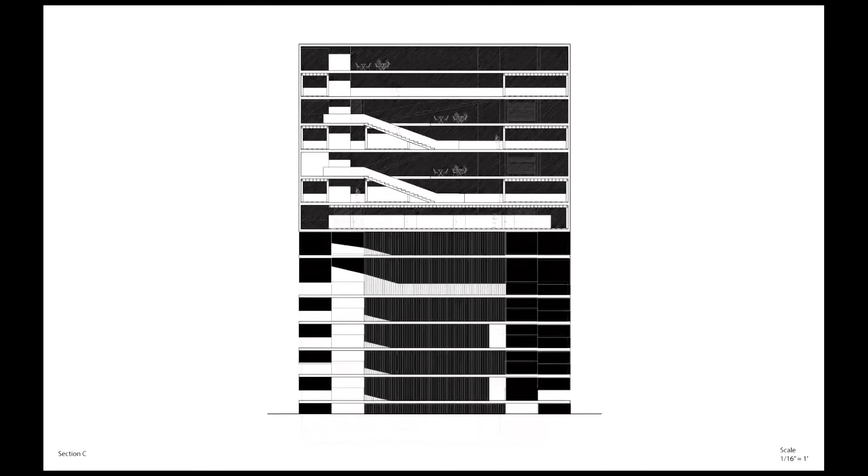Rather than extrude one form as Cohen articulated, I created a flicker using 4 different ordering systems that collide in the center. The result is not only a flicker in plan, but elevation and section as well. The role of figuration in elevation is to abstract the interior organization and reading of the section. It is here as you move from elevation through section into the building and back out that the flicker effect is experienced. Spaces closest to the edge retain a similar language as the elevation, but as the 4 ordering systems move in on each other, the flicker effect is achieved.

Program is broken up into smaller discrete short-term programs near the base and larger long-term programs near the top. All zones share equal access to a locker room located in the center of the building. 3 different circulation types code the sequence of occupation, connecting the 4 different zones to one another. A medium-sized semi-exterior path connects individual discrete programs. A small semi-enclosed path connects medium-sized programs, and the large, fully enclosed path connects the upper, larger programmatic zones.

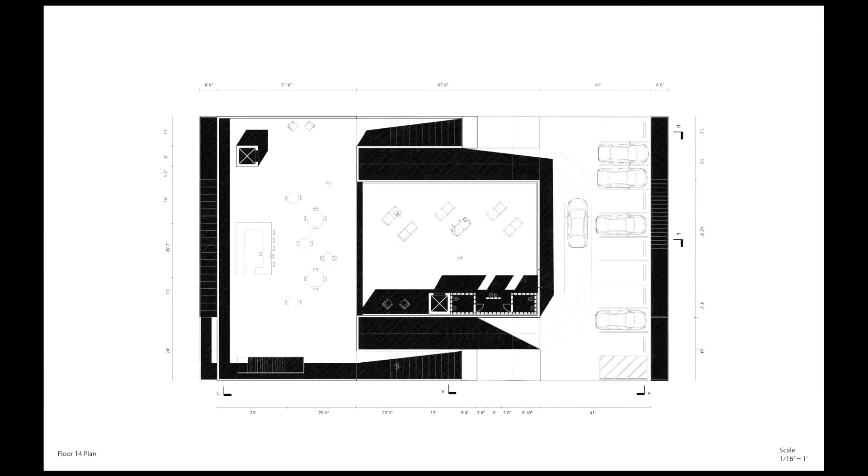In plan, the flicker effect is facilitated by a split-level parking organization. Program and parking flicker from side to side as you move your way up the building. The central axis shifts or flickers halfway up, giving way for more programmable space and more nuance in section. In my project, elevation is an indexical device which both brings the section to the facade while simultaneously confounding it.

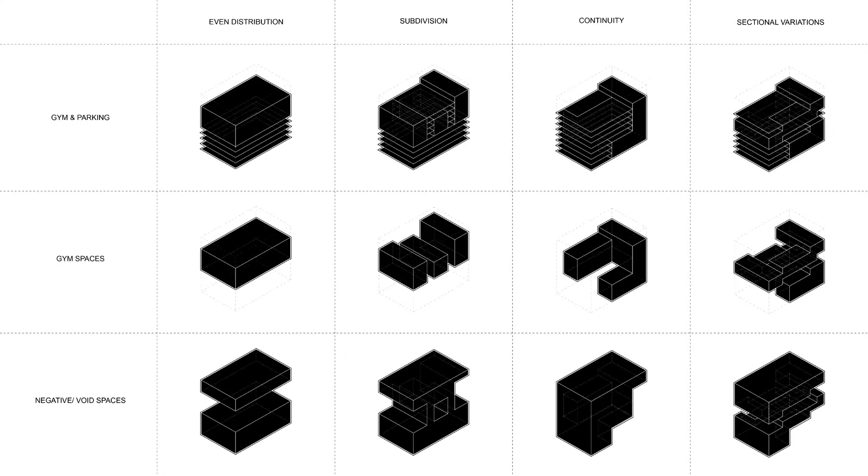The program layout started with a simple overlap between the parking and the gym, which then subdivided into general programs, wet programs, and dry programs. Then all 3 gym programs are connected at different elevations to create spatial continuity. Lastly, these programs are then rearranged in an ascending loop, which creates various sectional conditions. As a result, the parking program is essentially shaped and nested in between different types of gym programs.

The building sections demonstrate that people constantly negotiate different in-between conditions as they move through the building. Visitors continually move between different materiality and interiority or exteriority, sometimes cutting through different programs to get to other programs. Sometimes they would experience different spatial environmental conditions when they're doing the same exercise.

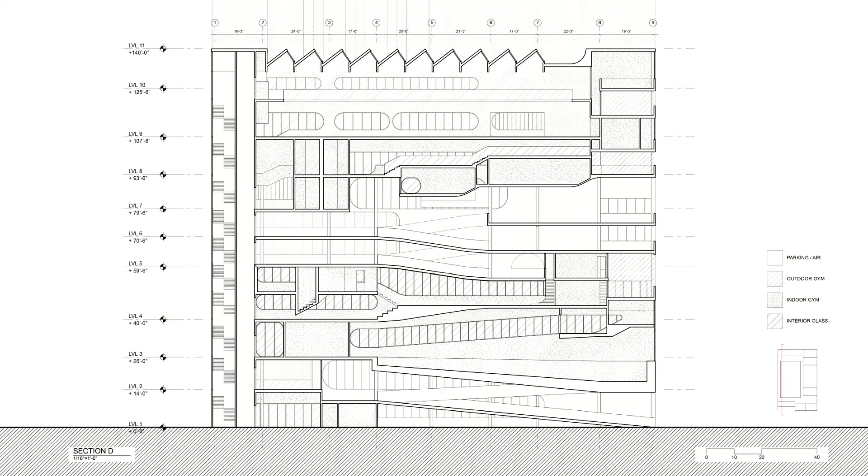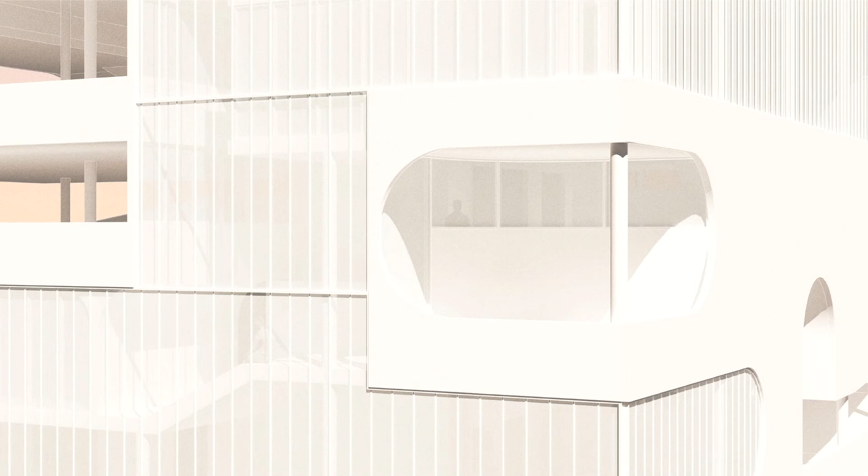And here are two exterior movements. The first one shows the exteriority of the inside of the building, and the second one shows the exteriority of the outside of the building. Here's a closer look at 4 fragments of the building that host all of the gym programs. The first fragment, which is located at the lower back of the building, consists of the majority of the general programs, including lobby, office, and a cafe. Here's an image looking at 2 different spaces that are split by circulation.